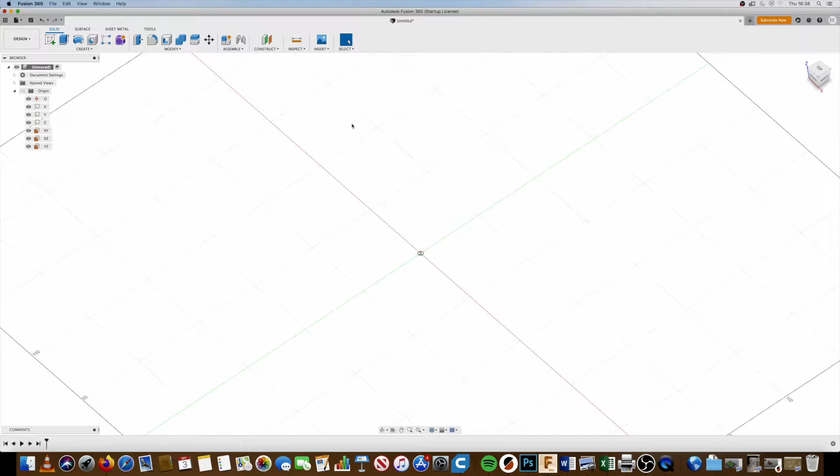So just going to show you how to import a reference image and trace it out in Fusion. So we go to Insert Canvas.

We select our image. With Fusion you always get these little pop-up menus to explain what you need to do next, and the thing we need to do is tell it what surface to place that image on. So I'm going to pick this one here.

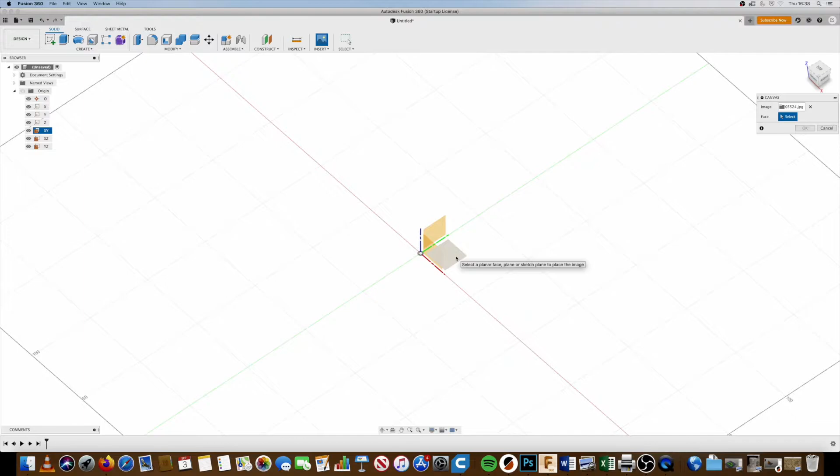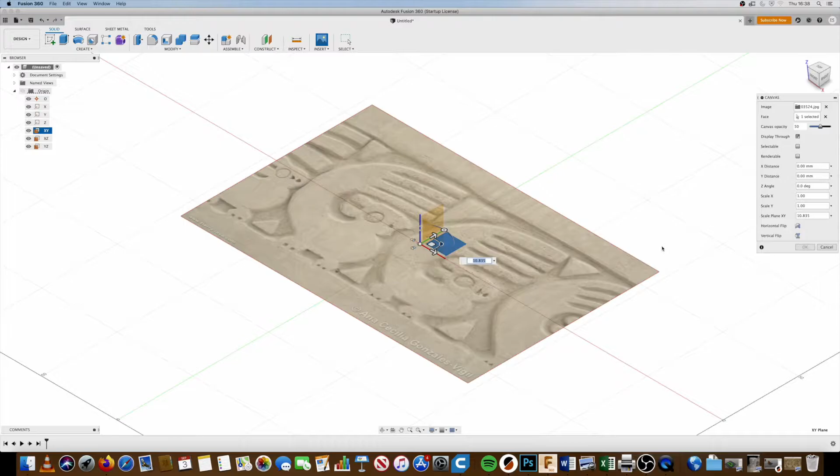If your camera view looks different to mine, for example if you're in a top view, clicking on this little home icon will give you that ISO view. For the face I'm going to select this one, then just drag the image out a bit. Don't worry about the scale too much at this stage because we're going to calibrate it in just a second. When we're happy with it we're going to press enter or OK.

At the moment, if we were starting to trace and 3D model this, we wouldn't actually know what kind of scale it's at. So the first thing we need to do before we start modeling or tracing is to calibrate the image and give it real-world dimensions.

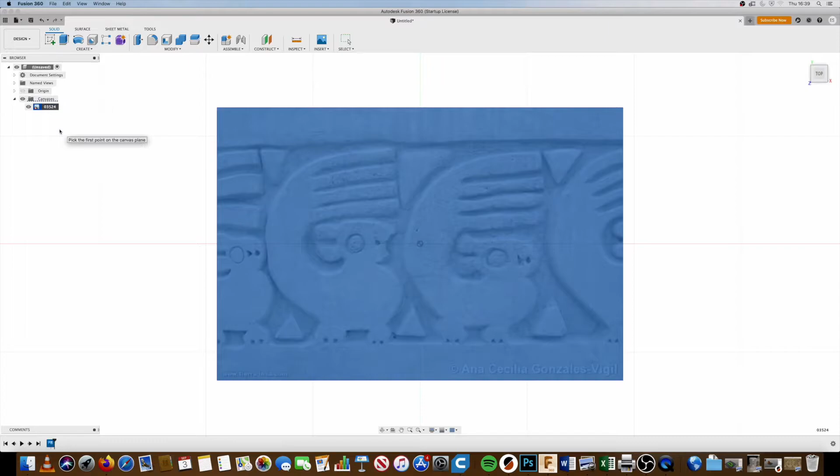To do that, we control right-click on the image in the canvas drop-down. If you can't see this, it might be that your folders are shut, but if you open them up and then control right-click and select calibrate, you're then going to pick 2 points on your image where you know how far apart they are. So in this case I'm going to go from here to here.

I'm then going to tell this I want it to be 30 centimeters, so 300 millimeters. I'm then going to zoom out a little bit, and now I know that if I start modeling on this, this point to this point is 30 centimeters, which is the dimension I want the final piece to be from here to here as well.

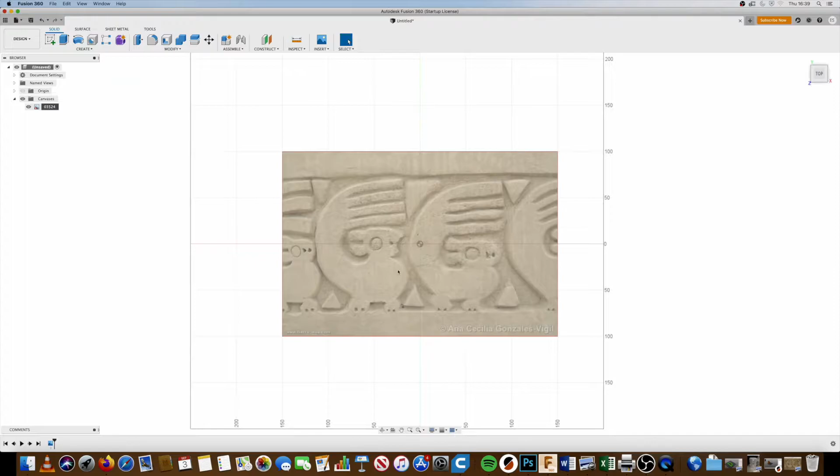Okay, so once my image is in there and calibrated, we can actually begin to start modeling. So the first thing I want to do is just do a simple rectangle extrusion as a kind of backing board. So create sketch, again picking that back plane, select rectangle, and let's go roughly from corner to corner.

If you want to dimension your shape, hit the shortcut D, select one of the edges, move up slightly, click it to place it, and type in manually what dimension you want. So I'm just going to do these two.

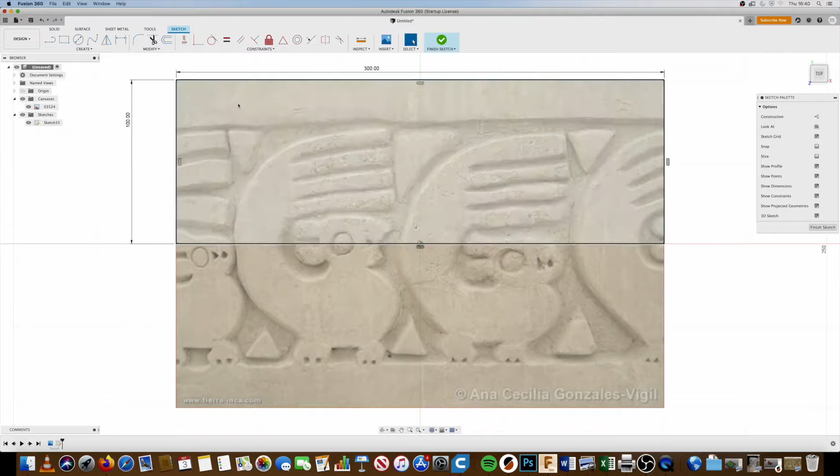If you want to change that at any point, you just double click it, and again you can manually input the dimension you want, and you see it resizes my rectangle. So once we're happy with the rectangle, finish sketch, move to a slightly ISO view.

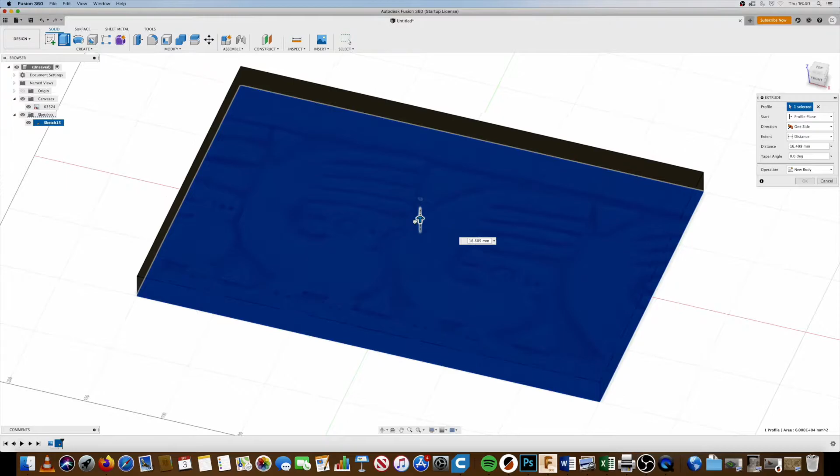We can either press the extrude shortcut here or down here. Click it, and then you can either manually drag this to create thickness, or you can input it here. So I'm just going to put 10 mil and press enter. So we've got a kind of backing slab.

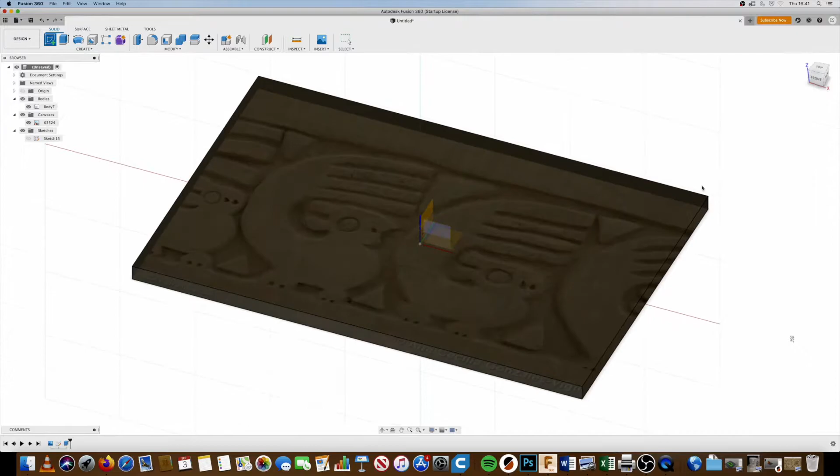And then what I want to start doing is tracing out the detail. So to do that, I'm going to create a new sketch. I want to tell the software that I want to draw on the top surface of my extruded rectangle. So I just click it.

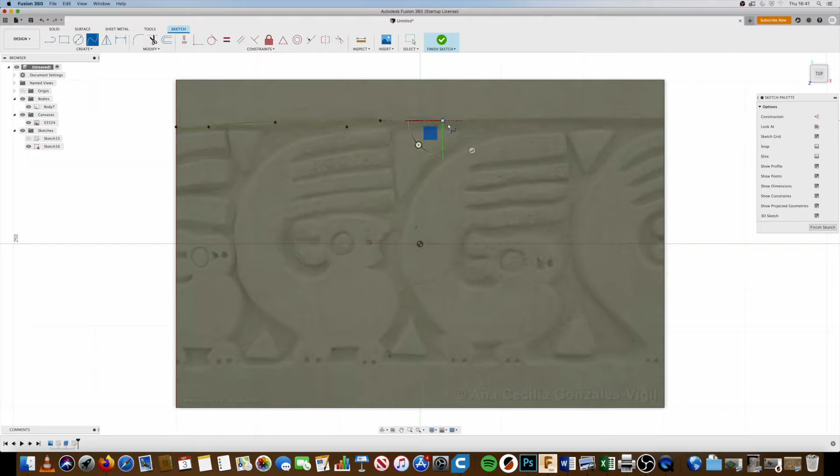And then to trace the image, I'm going to be using splines, and splines are kind of similar to vector lines in Illustrator. So select spline, I'm going to go to the edge of my box, and I'm just going to roughly place my line in the software. You don't need it to be particularly accurate at this point, you just need to place the line down.

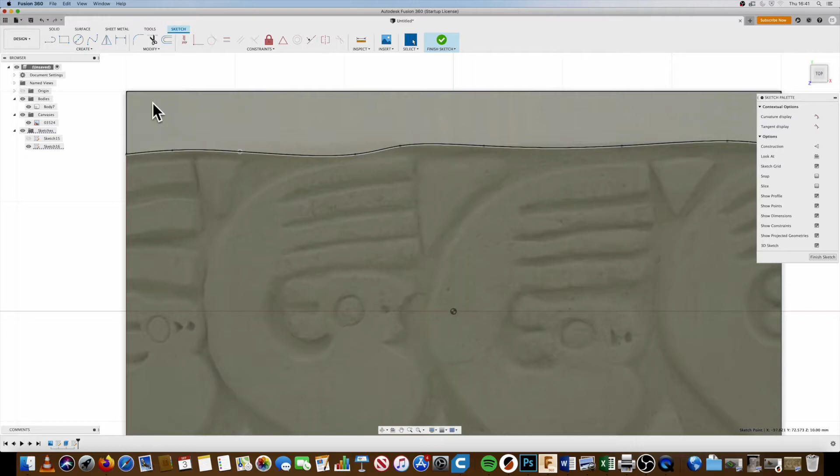And then what you can do is zoom in a little bit and just begin to pull on these spline points to get it more accurate. If you're finding it hard to see the image, just switch off this extruded rectangle by using the eyeball thing, and that's basically just making that first extrusion that I did invisible, so I can actually see my image a little bit more clearly.

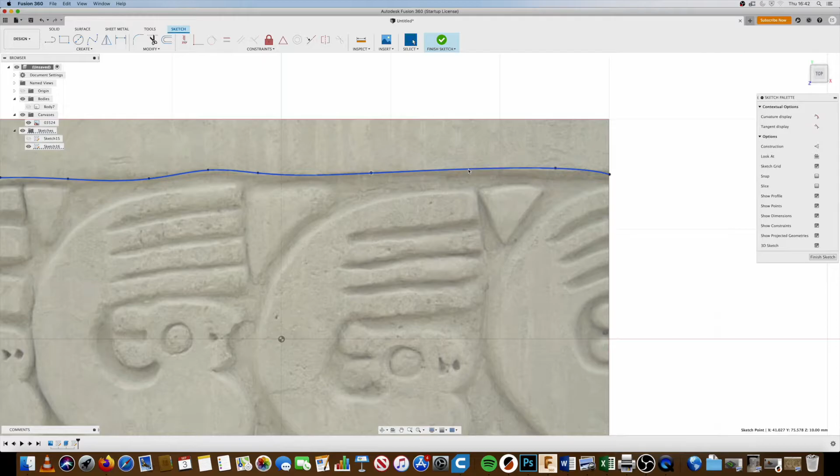And so I'm just going along and adjusting my spline. If you feel like you need extra points along your spline, just control right click and do insert spline fit point, and you can actually add more. I personally prefer to have less spline points, I find it easier to control, but if you do a few too little, you can manually add them like this.

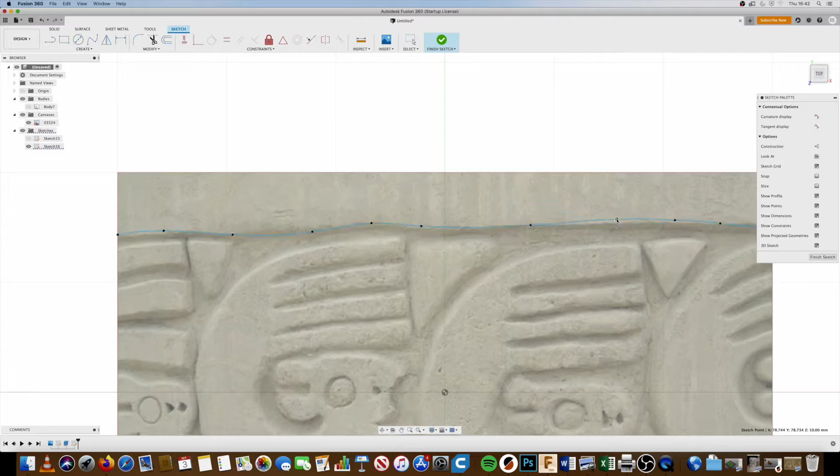Once you're happy with your added points, just hit enter, and then you can continue adjusting. My tip when adjusting your spline points is to work from one end along. Don't adjust one here and then adjust one over here. Instead, work from one end and just go along, and it will give you a lot more control over that movement. Splines can take a little bit of time to get used to, but once you've got it figured out, they're really easy to work with.

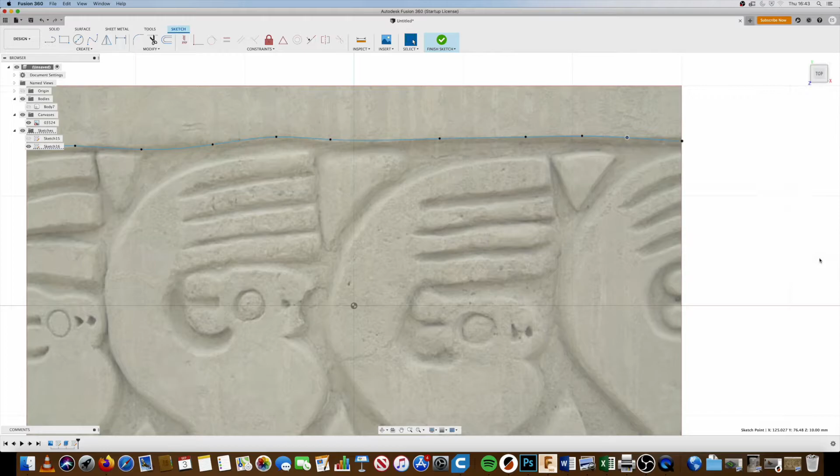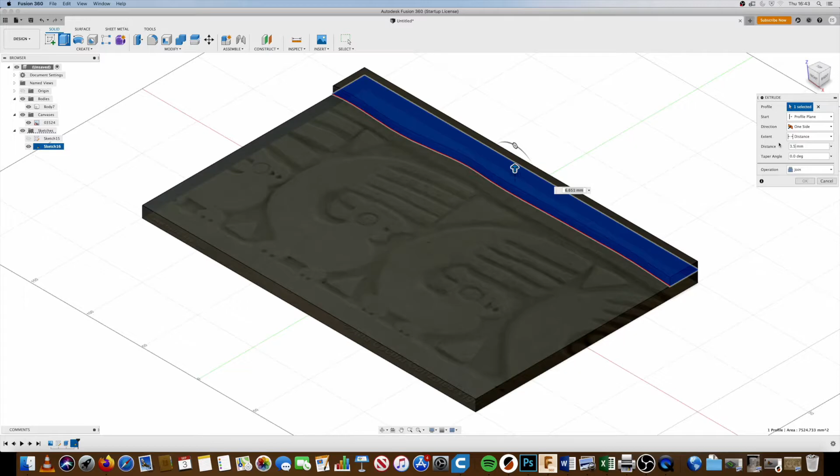So that's our first spline. I'm going to press Finish Sketch. I'm then going to switch the visibility of my original extruded body back on. Go to the home view. I can then go to Create Extrude, select that profile we just created, and extrude it again. So might go for 3.5 mil this time. And hit Enter when you're happy with it.

And you're basically just going to continue doing that. So create sketch, select the top surface of your design, get a nice view orientation, and then just work with the splines. So let's go for something a little bit more complicated.

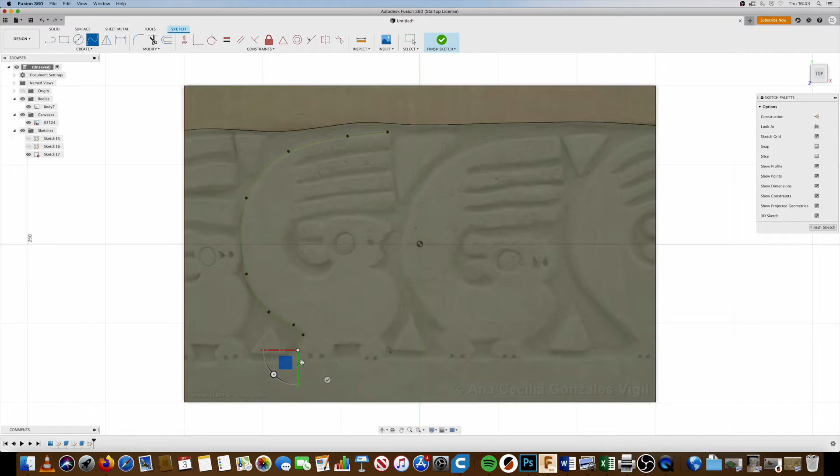Again, just sporadically placing down my splines. If you want to end a spline, you just double click, and then you can begin another one. So if you don't want to just do a massive continuous line, you can begin a new one.

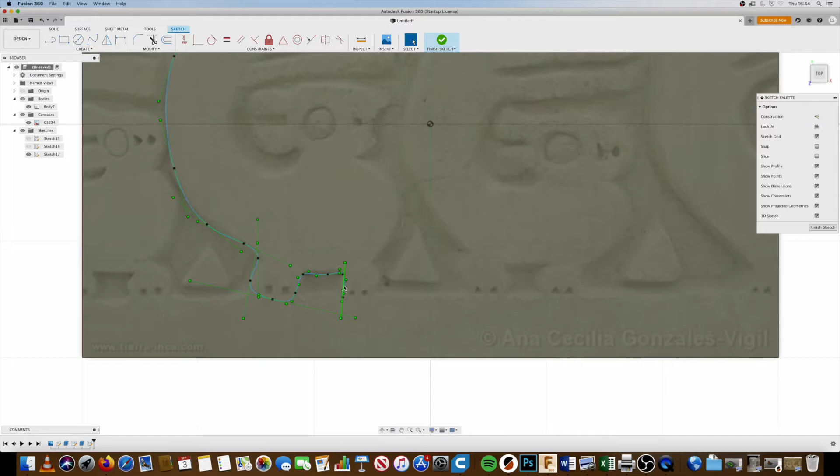Don't know what's going on there. Let me just zoom in a little bit. Seems to be getting a bit confused, so I can always select a spline and press backspace to delete it. I don't know why it's giving me a bit of an error there.

So again, you can see I'm just going around really roughly to just show you roughly how it works. Again, ending my spline there, and grabbing a new one.

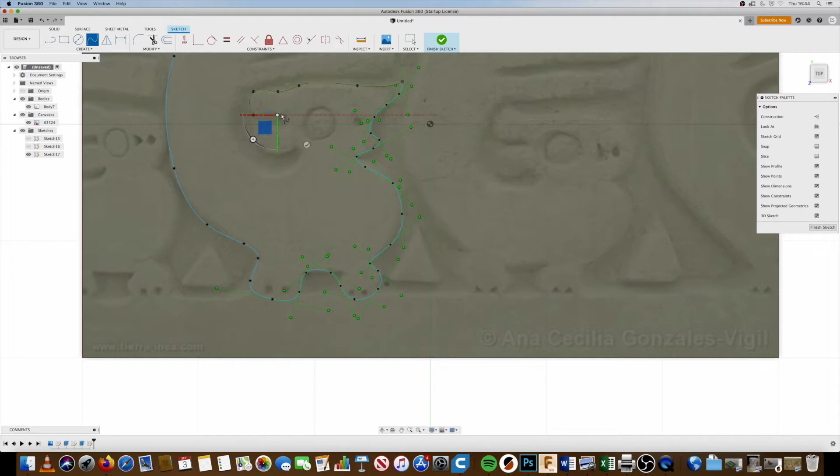I would say for the 3D printing in ceramic, it's better that the gaps between areas are bigger rather than smaller. And what I mean by that is, try not to have things too close to the line above. The more spacious it is, the better the detail is going to come out.

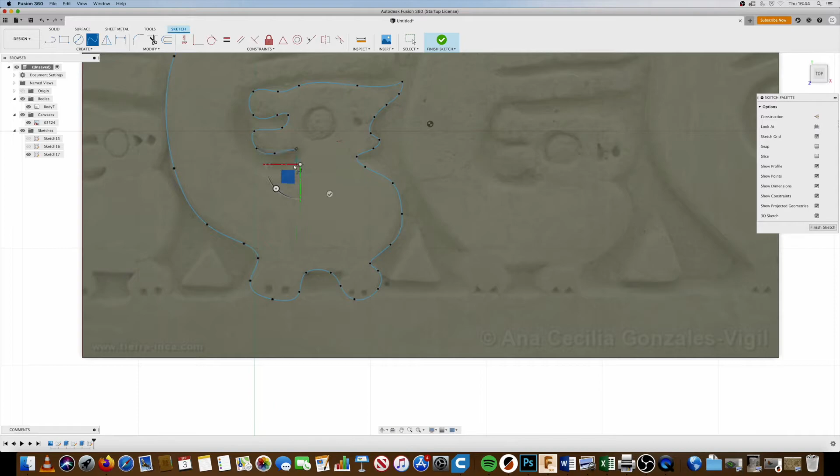So I am really whizzing through this just so you don't have to watch me doing this for ages. And I'm not going to bother going through all of these crevices. I mean, you totally should, but I'm just going to quickly cap this off. Otherwise, you're just going to be watching me trace around everything for a super long time. But you could just trace as many of those details as you want.

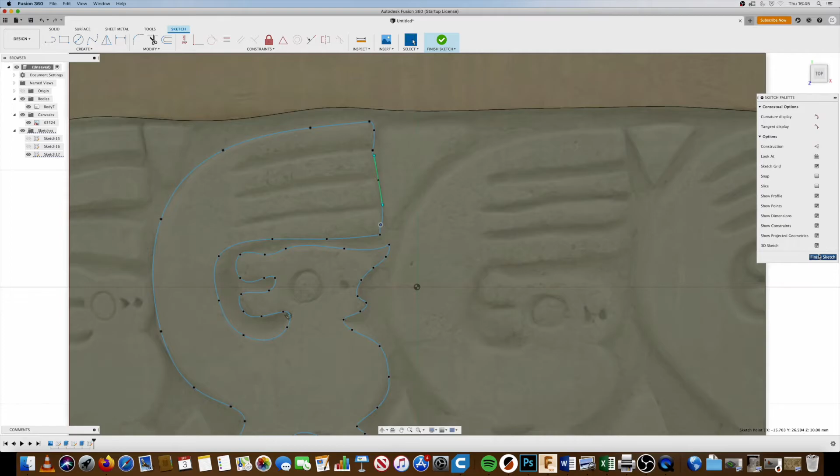I think I need to add a couple of extra splines on here. Hit Enter, just bring it around. Okay, cool. Again, once you're happy with your outline, finish your sketch and create extrude.

And you know, you can either make it the same height as your first extrusion, or you can play around with that a bit. It's up to you. I think my last one was 3.5. I can make this one 5. Just keep in mind that the thicker and the more dense you make this, the longer the print time is going to be.

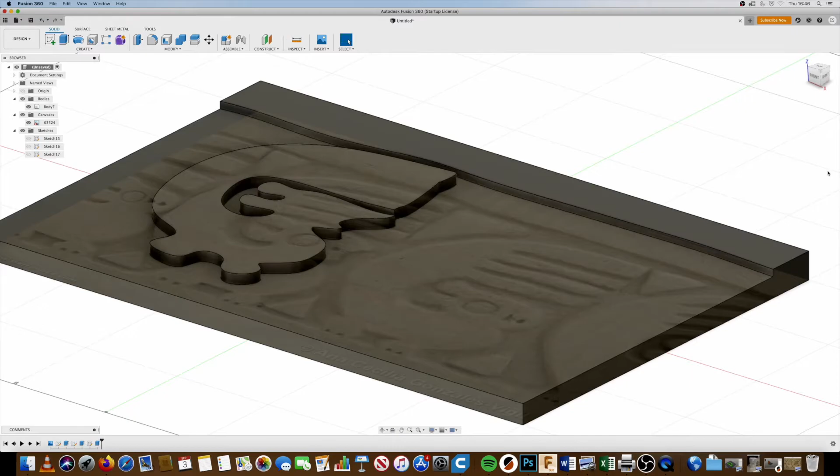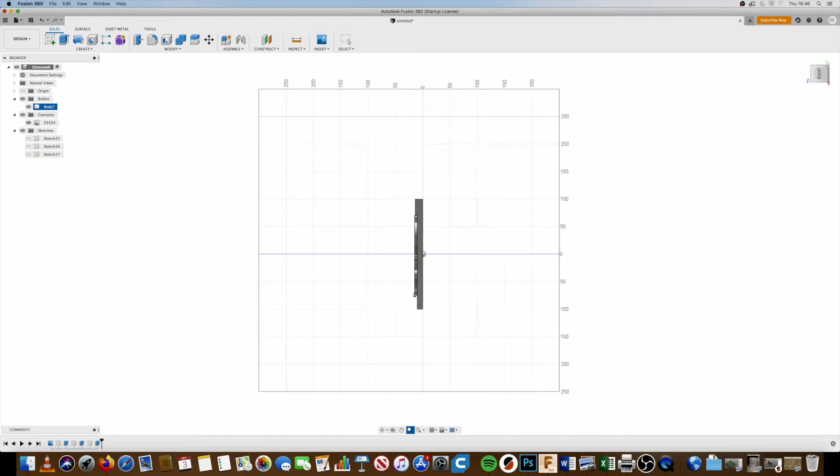Because what I was hoping was that we'd be able to print this kind of like this way on the build plate, like upright. So the build plate would be here, but these overhangs are too great. You can't print perpendicular to the build plate.

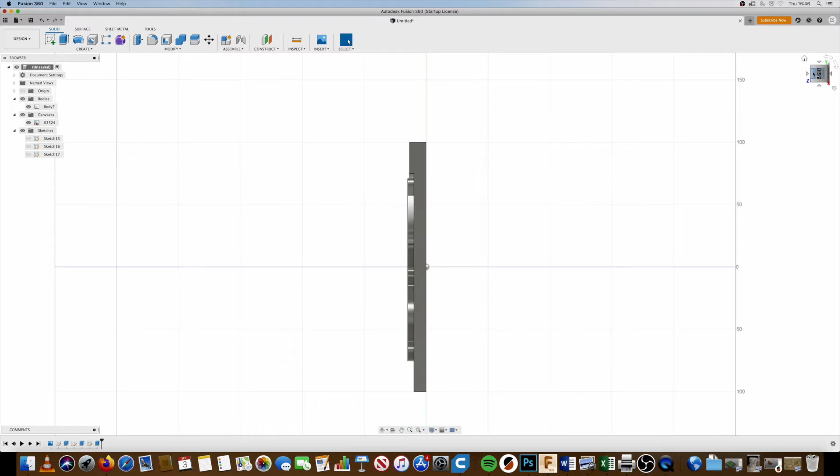So what I'd hoped is that we could have chamfered these edges, and chamfering is when you bevel off an edge. And I was really hoping we could chamfer these edges and print it upright like this. But unfortunately, because the design is quite complicated, there are some edges that it won't let us chamfer. So just to make that super clear, chamfer is when you bevel an edge like this.

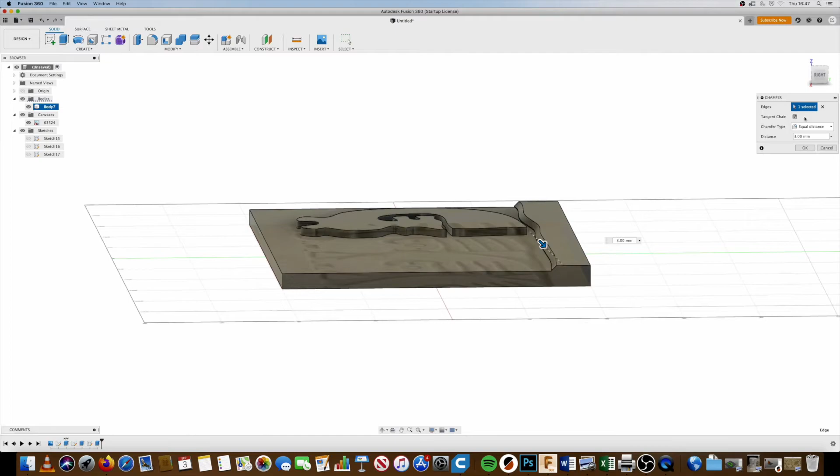Yeah, even that edge it's struggling with. So it's when you put one of these slightly angled edges on. That would be great if we were going to 3D print this way around, because it means the printer would have an angle instead of a 90-degree overhang, which it can't do.

But because our design is a bit too complicated to do chamfer edges on all of the edges, if I try to do a chamfer on these edges it just gives me an error message, even if I bring that chamfer down. That's to do with the curves - it can't chamfer like this when there's a tight curve.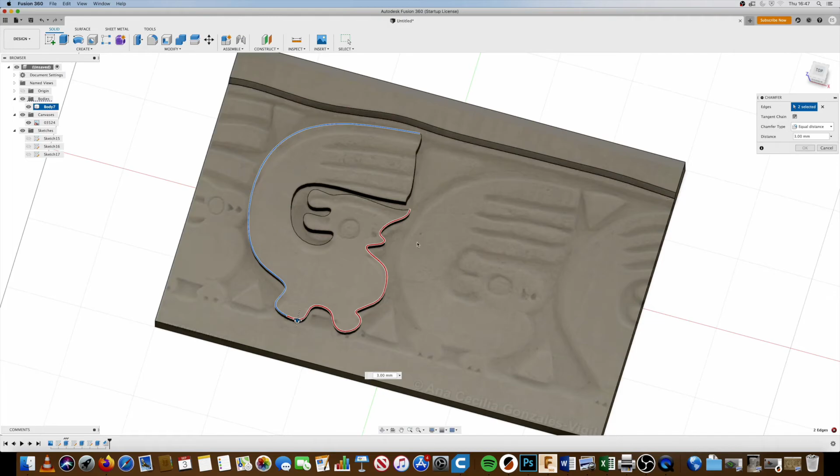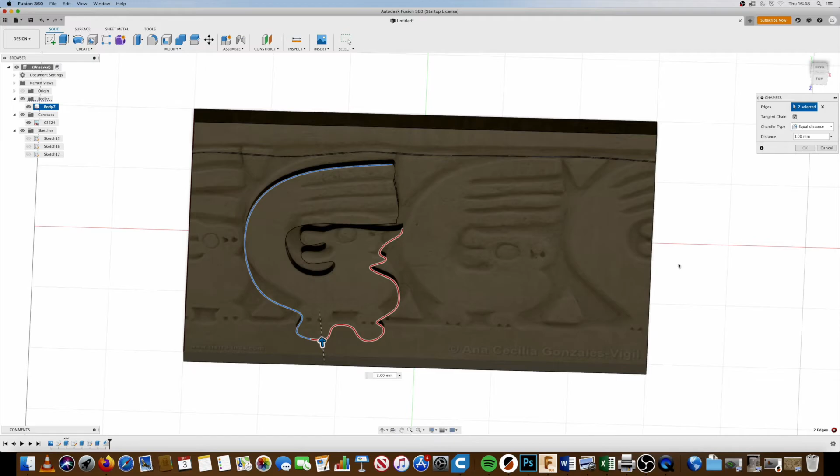What that means is these edges become impossible for us to do upright on the build plate, which is a shame, because printing it upright would have given us a decent level of detail, and we could have printed it hollow with a single perimeter wall. Instead, we'll have to print it flat on the build plate, so we won't get as clean a print, and we'll need infill throughout, meaning a longer print time. It's not the end of the world, but it just means our print won't be as neat as I'd have liked, and will take a bit longer.

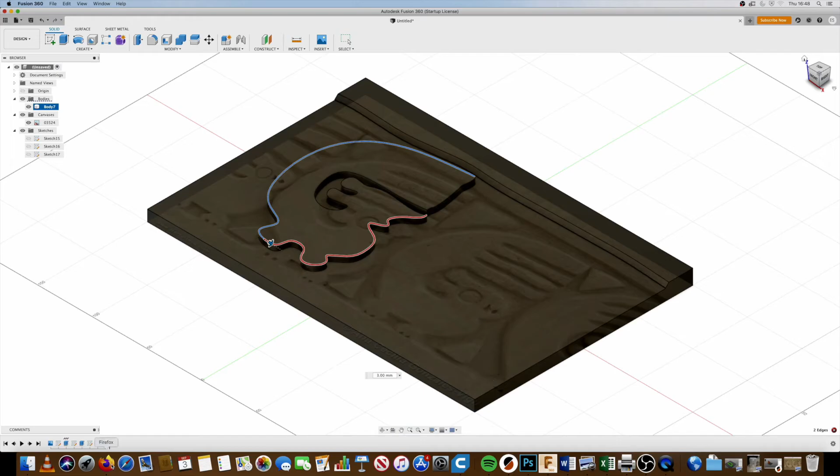So I'm just going to quickly undo that chamfer. This is a nice thing about Fusion - you have this timeline at the bottom, and I can move it back. I can control right click and tell it to delete features after the history marker, and it will get rid of that feature. So pretty much what we'd have to do is keep doing more sketches and extrusions.

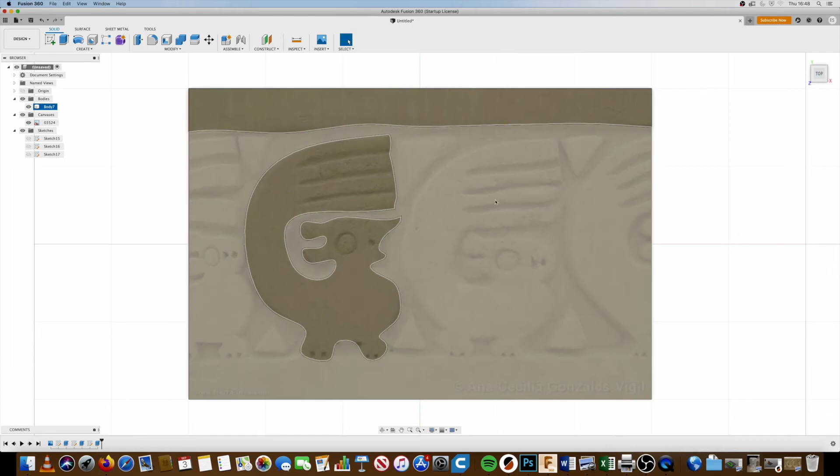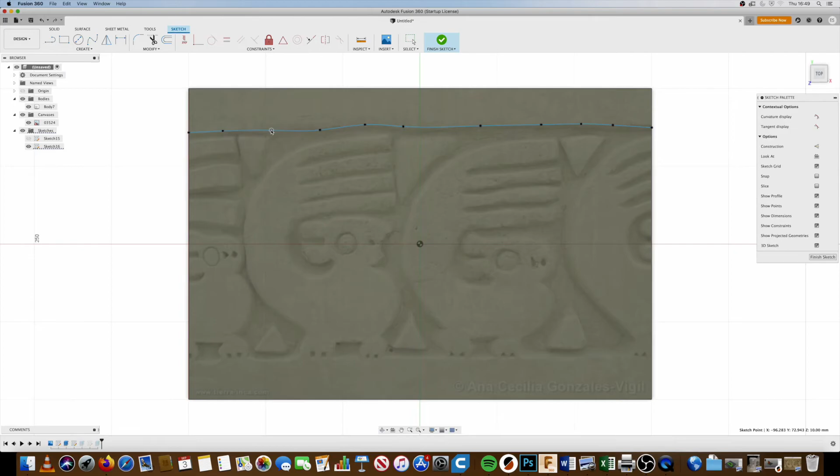If at any point you wanted to go back into an existing sketch and edit it - say you thought one of these lines isn't exactly right - you find the sketch it was created in, control right click, edit sketch, it activates that sketch, and you can go in, change it, finish it, and it will update the entire object.

Same with your extrusions - say you decided that's not as deep as you want it to be, you can control right click, edit feature, manually adjust it, press OK, and it will update the whole design. So throughout that modeling process, you can go back through your timeline and make changes. Now, aside from extruding upwards, you can also cut into your model.

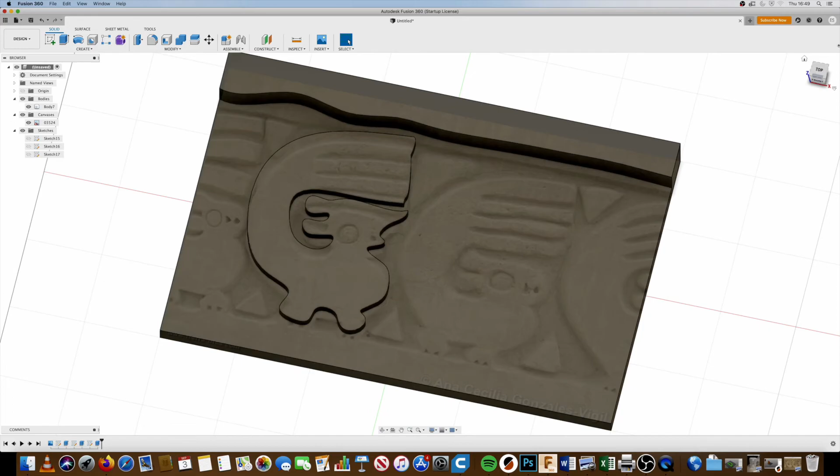Say for example I wanted to add this eye detail. I could just go create sketch, click on the top surface of the outline of the animal, zoom in a little bit, select my spline, and draw this around, and just get that looking nice. I can see it's got a slight offset, so modify offset, select my spline, bring this in a bit, and press enter.

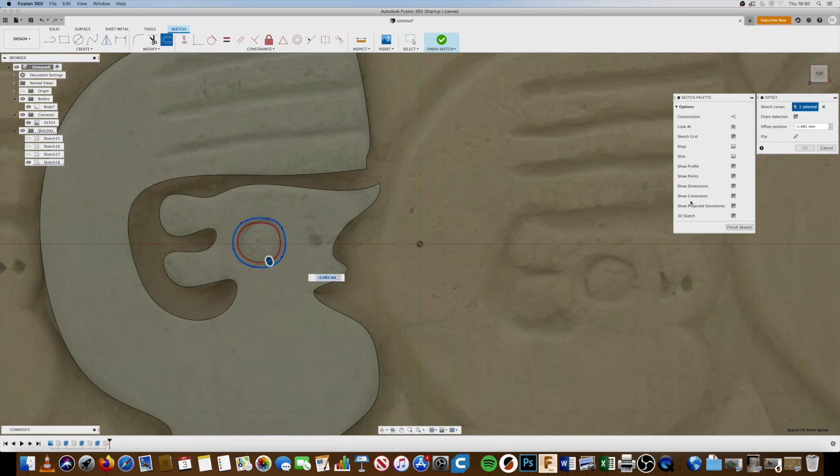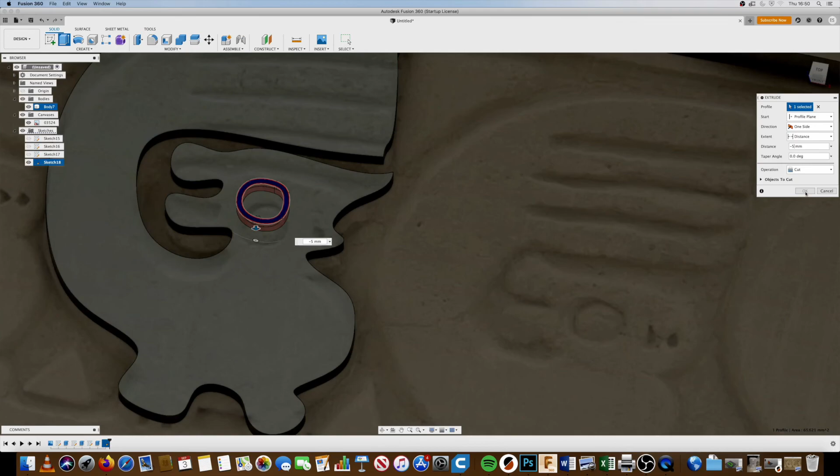Finish sketch, create, extrude, select my profile. Now if I drag up, it will extrude and add volume. If I drag towards a solid shape, it's actually going to cut into it. So I could tell it to go to, say, -5, press OK, and it actually cuts into the object. So you can use this extrusion tool to add and also subtract material.

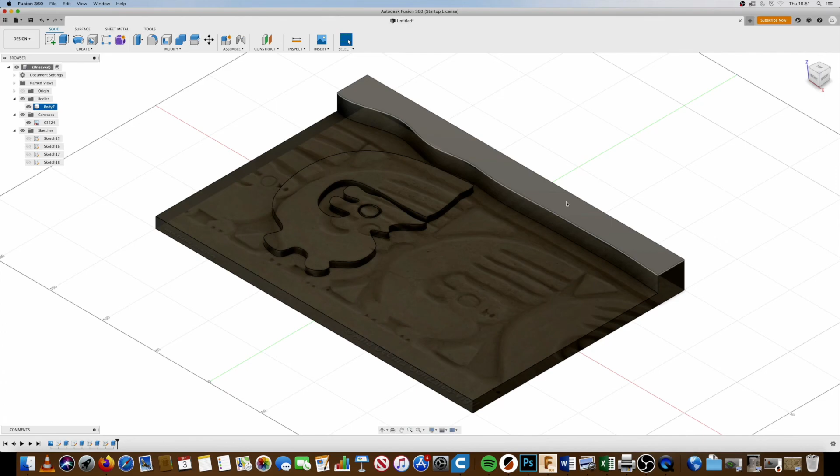I think that's about it for now. Just have a go at tracing that all out and get your extrusions done. I would say the less chunky the design is, the better - if you could keep your extrusions not too thick that would be best, because something like this will take ages to print, whereas something like 3 or 5 mil is going to be a bit more efficient. Yeah, I think that's about it for now. Have a go at this and let me know how you get on.